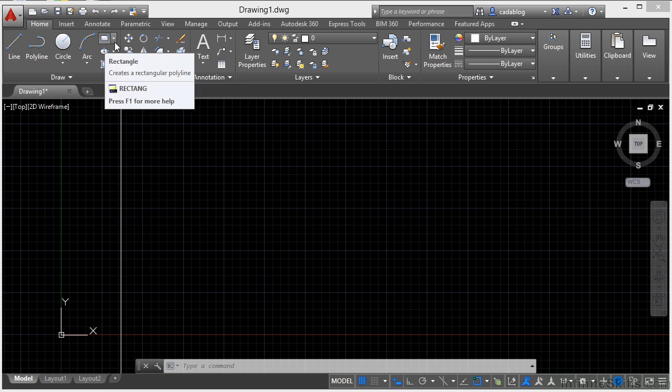Each tab has a panel. The panels contain the commands and tools you're going to use, and like the tabs, are grouped by similar commands. For example, the Draw panel in the Home tab has the commands you need to draw lines, polylines, arcs, circles - the line command, polyline, circle, arc, rectangle, center ellipses, and other items. If you look at the Annotation panel, you can create dimensions, leaders, tables, and text.

To switch between tabs, you click the tab you want to work in - so click Insert, then click on the button to use the Insert command. If you aren't sure which command icon is for which command, just hover over it. This will pop up a balloon called a tooltip, and if you hold it there a bit longer, an expanded tooltip will show up giving you more information about that command, tool, or setting.

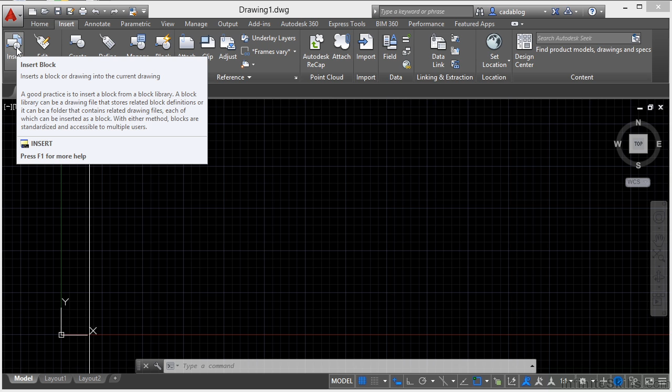These are very handy, especially when you're first learning to use AutoCAD. The tooltips give you the name of the command and a short description. If you want to learn more, there is a link inside a lot of the tooltips to get you to the help screen. Or as you hover over any tool, press the F1 key to bring up the help system for that specific command.

Some of the panels collapse, meaning they shrink to give you more room on your screen. If I go to the Home tab, you can see a lot of these are shrunk down - the groups, utilities, clipboard, and view. As I hover over them, they will pop out and expand for us, showing us exactly what's in that panel.

To activate a command, you simply go to the tab and then to the panel you want, hover over the icon, and then left-click on it. Now some of the commands, like the circle command, have fly-out icons. You can tell because there's a little arrow here. Arc has one, and these commands have one as well for the rectangle, the ellipse, and for hatching.

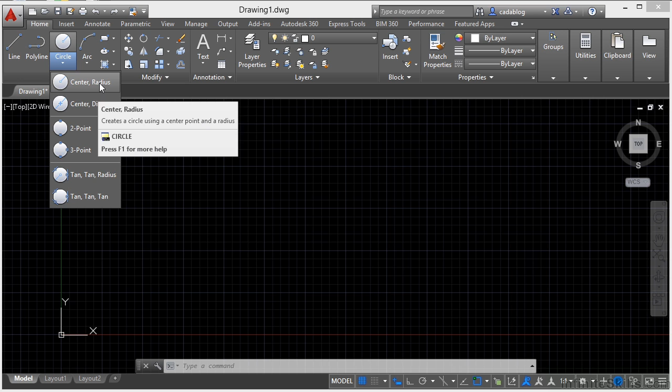So to access the flyouts, you just click the arrow and another window will pop up showing you the other options for that command. There are a lot of different ways to draw a circle, and these different commands in the flyout give you the ability to draw a circle in that way. Same way with an arc, or with a rectangle, or a polygon.

Now the rectangle and polygon aren't flyouts for that specific command, but they are flyouts for similar commands that you might want to use. This is done because you don't always need the polygon command, but yet you want it and want to be able to use it, so you can get to it quickly this way, and it saves them some room.

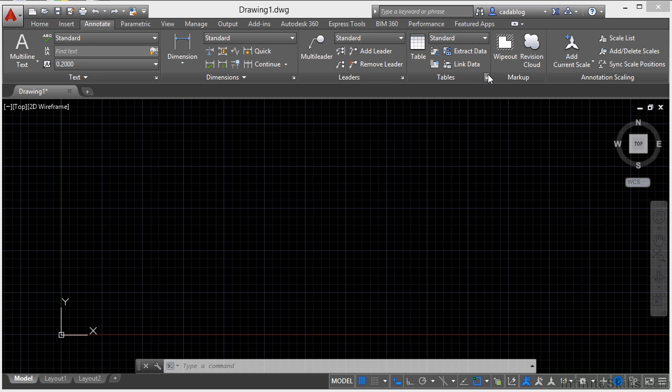Now some of the panels have style managers. For example, if I go to the Annotate tab, and to the text, or the dimensions, or the leaders, you'll see this little diagonal arrow in the bottom right-hand corner. This is the style manager for your text, for your dimensions, for your leaders, for your tables. So if I left-click on that, it will open up the text style manager.

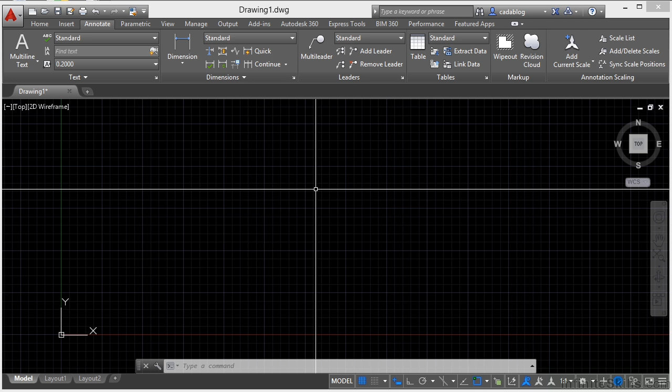Now there is another type of tab that will show up in the ribbon from time to time, called contextual tabs. These tabs are not accessible at the moment, but they will show up when a certain command is activated. These tabs will contain tools that you will not need or be able to use during your normal working conditions, but the contextual tabs have tools in it that you will need in special cases.

One example is the Hatch tool. So if I go to the Home tab and I want to create a hatch, I click on the Hatch command, and this will bring up the contextual tab for hatches. As you can see, it pops up, kind of highlighted in blue right now, so it tells you, hey, this is where it is.

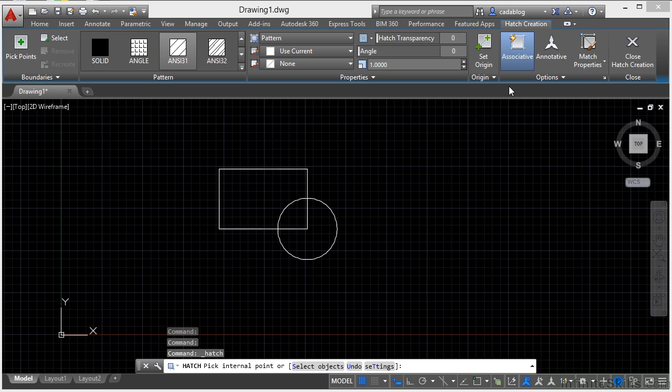Now I can go to one of these other tabs if I want to, and it's going to remain up here until I cancel out the command. This gives me all the tools and settings and options that I need to create a hatch. I can also manipulate the hatch as it's already started, changing some of the things in it if I'd like, or going on and creating a new one. Once you finish your command, that contextual tab will go away.

As we come across these contextual ribbon tabs throughout the video, I'll make sure to point them out to you.